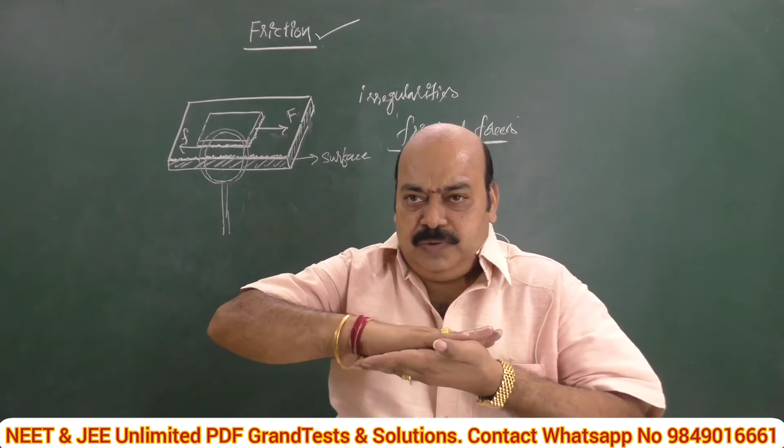Hence, we can prepare a definition for the title of today: Friction. What is friction? It is a force, of course. What type of force is this? An opposing force that comes into existence to oppose the relative motion between two contacting bodies. That means if we keep one body on the surface of another body, when one body tries to move, they are moving relatively, these forces come into existence in the opposite direction to stop this motion. They are called opposing forces. So, what is frictional force? The forces that come into existence when two bodies in contact with each other are moving relatively - such forces are called frictional forces.

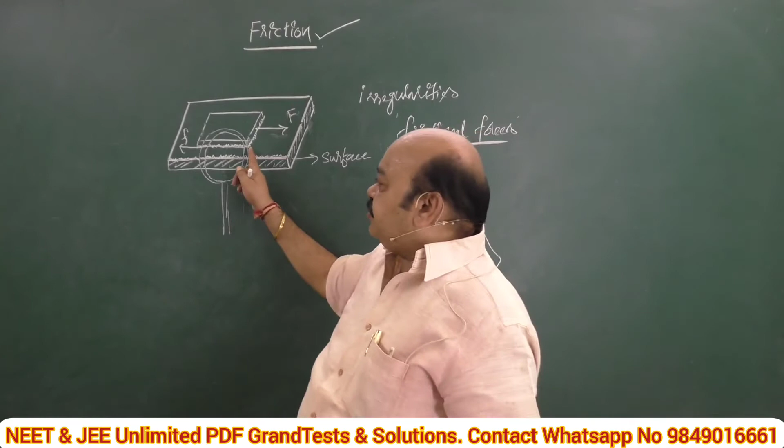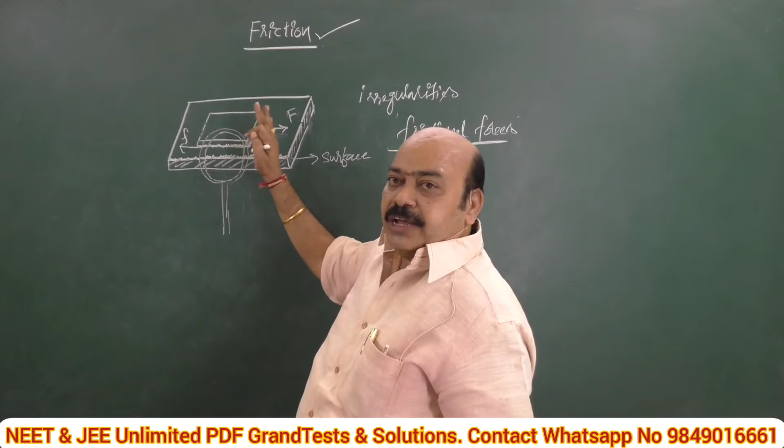Now, how many types of frictional forces are there? As per our discussion, more amount of force is required to just start the motion of a body, whereas once it is started, that much amount of force is not required to continue the motion. So now we are going to discuss different amounts of forces and what are the different types of forces. Let us come to the first one.

These are called static frictional forces. Static friction, simply static friction. Otherwise, this is also called limiting friction. Let us see what do you mean by this one.

It is a surface on which another body, say a wooden block, is placed, and here we are arranging a pulley. See, this is a pulley arranged to the edge. It is passed over this pulley and to this, a weight hanger is suspended. This is the position of the weight hanger.

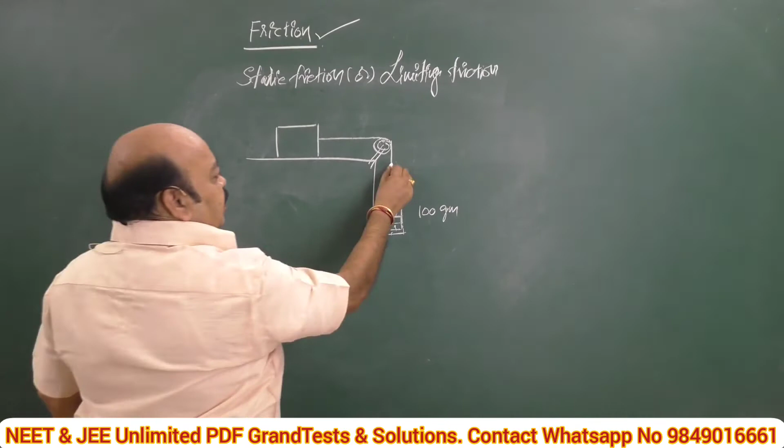So that we can change the amount of loads in this weight hanger. Imagine if I add 100 grams to this weight hanger. Definitely some tension we will notice in the string. It does not move. If we add one more disc of 100 grams, that means now it is increased to 200 grams. Now also it is not moving.

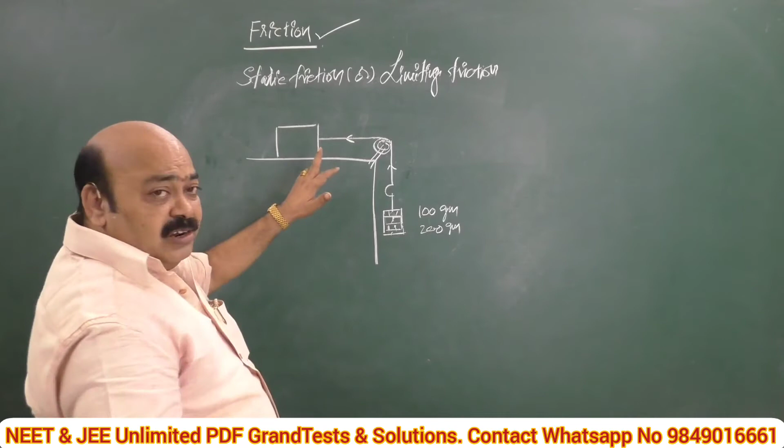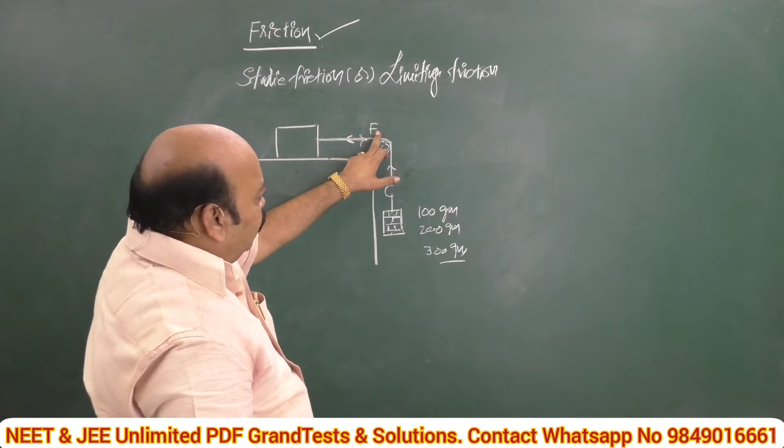At a particular stage, say for 300 grams in the weight hanger, it tends to move. That's why here the force which is pulling this is called F. This friction, this force comes equal to the frictional forces which oppose the motion. Hence it just begins to move.

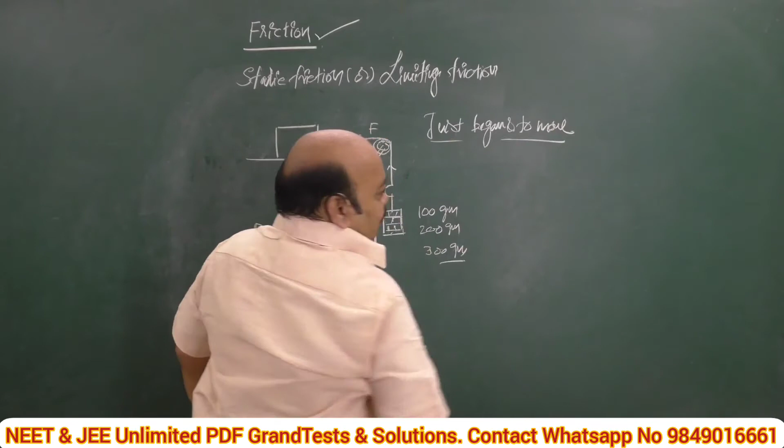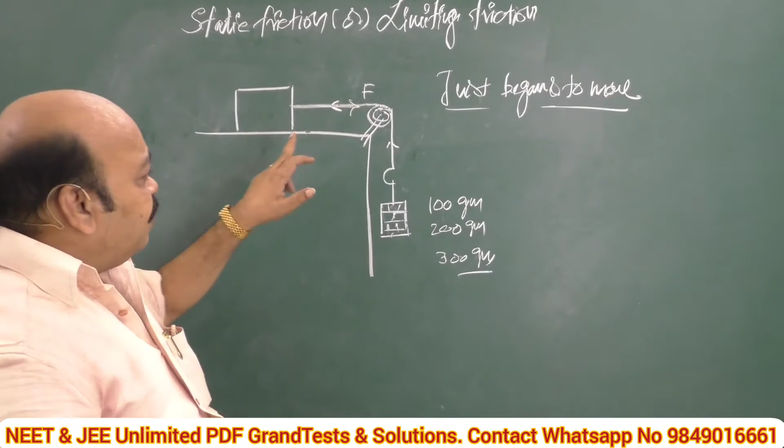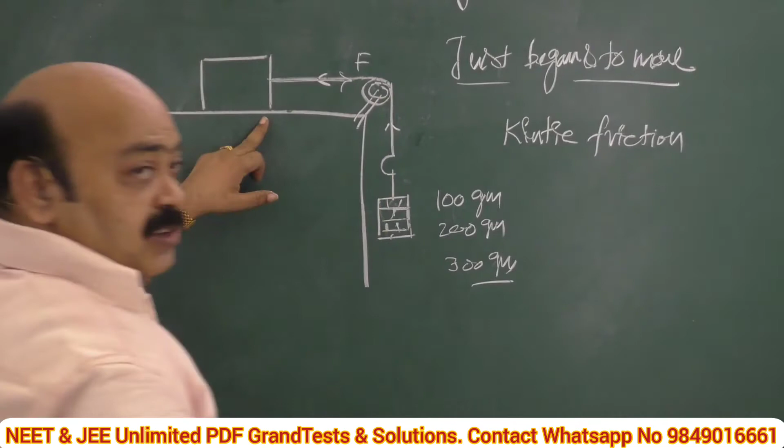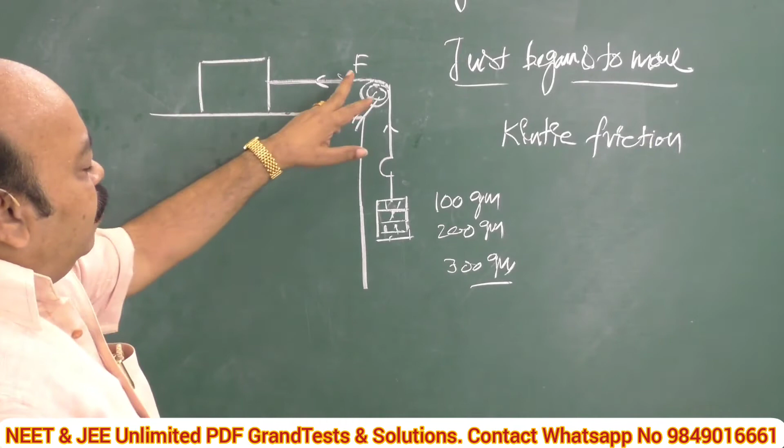Later what happens? Even if we do not increase the load, once it is started, it continues to move. Then the frictional forces that come into existence are called kinetic frictional forces. Kinetic friction. So the force required to just start the motion of a body over the surface of another body is called static friction, and the force required to continue the motion is called kinetic. The frictional forces that come into existence then are called kinetic friction.

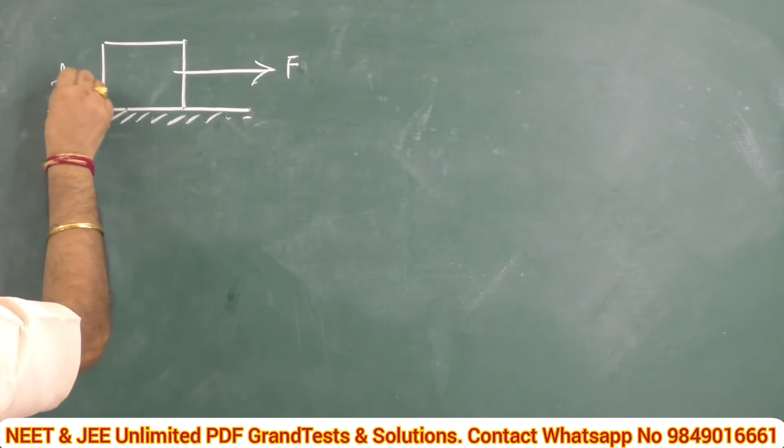Now we will try to get some conditions. Just we will consider the block diagram of this one. That means this is the block on the surface of a horizontal plane. Here this is the applied force F. As per our discussion, when this is pulled with a force F, opposing forces come into existence - they are called static friction or limiting friction, Fs.

Now let us take one by one. Case number 1: what happens if F is equal to 0? F equal to 0 means when no external force acts on the body. What happens? The block will be at rest. Simple - no force is applied, so it is said to be at rest.

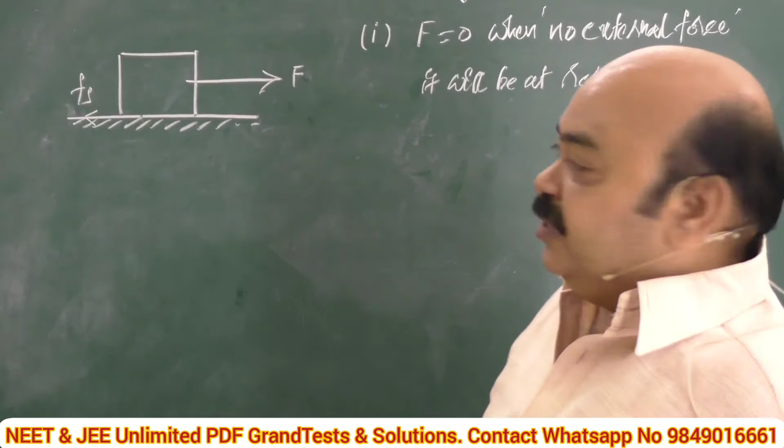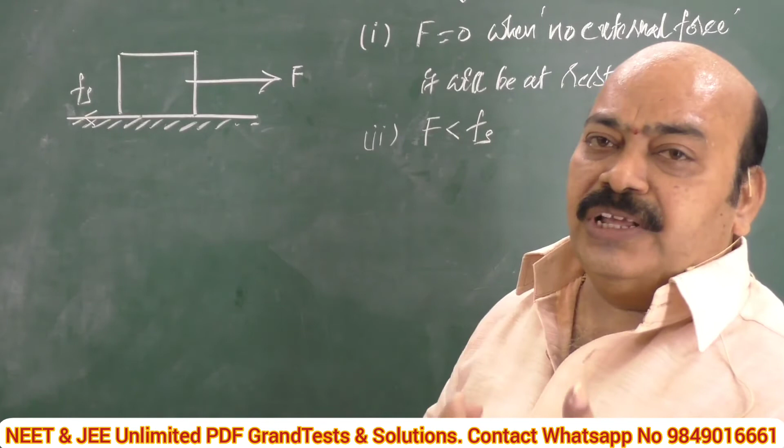Case 2: if we apply some external force, but that applied force is less than the limiting frictional force - that means F is applied, but it is less than what is called static frictional force. What is static frictional force? The force that comes into existence when a body just tends to move on the surface of another body is called static frictional force. Then when the applied force is less than static frictional force, what happens? In the previous case it does not move - that is at rest. In this case, same - it does not move, but it tends to move. Such motion is called impending motion. Technical word: it is impending.

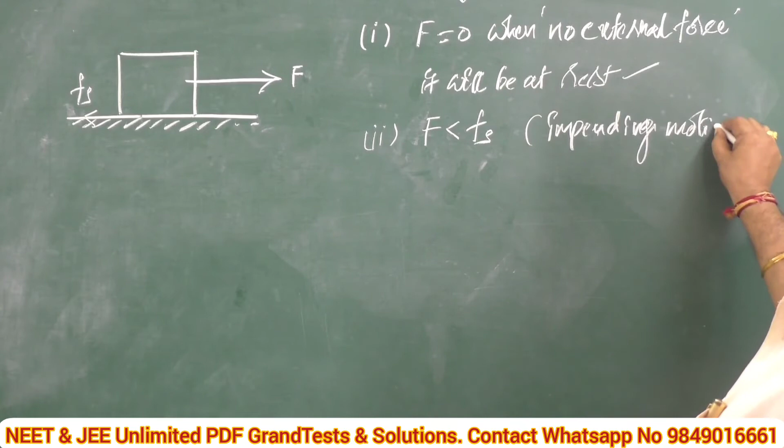Impending motion means what? Actually it is supposed to move, but originally it is not in motion. Such is called impending motion, developed inside this one. That's why even when we apply some force, it does not move, and these frictional forces developed are so called self-adjusting forces. Frictional forces are hence self-adjusting forces.

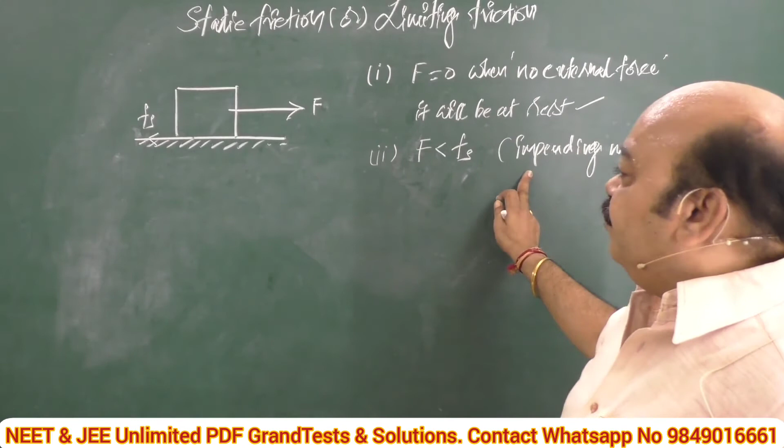Case 3, now see this one. If applied force, so called external force, becomes equal to static frictional force, what happens? Case 1, no force is applied. Case 2, force is applied, but it is less than static frictional force. Number 3, external force applied is equal to static frictional force.

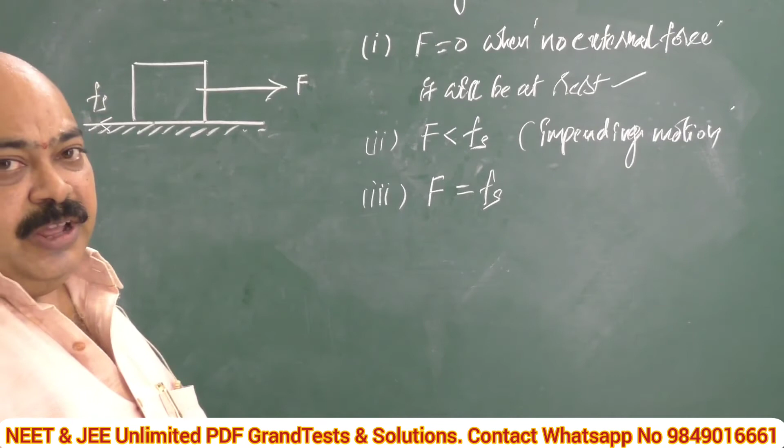Then what happened? According to the definition, when a force equal to static frictional force is applied, the body just begins to move. It just begins to move.

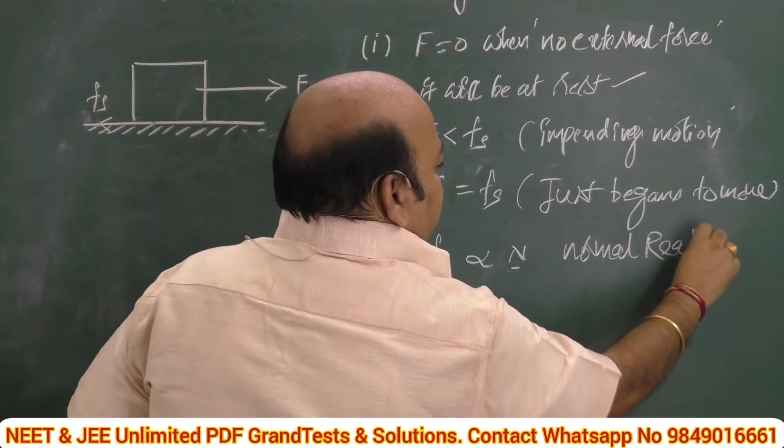And here one more interesting thing is there. It obeys one law also. That means this static frictional force, so called Fs, is directly proportional to N. Here I am introducing one more word. What is called N? N means normal reaction. Normal reaction. While explaining Newton's laws, number of times I repeat the word normal reaction.

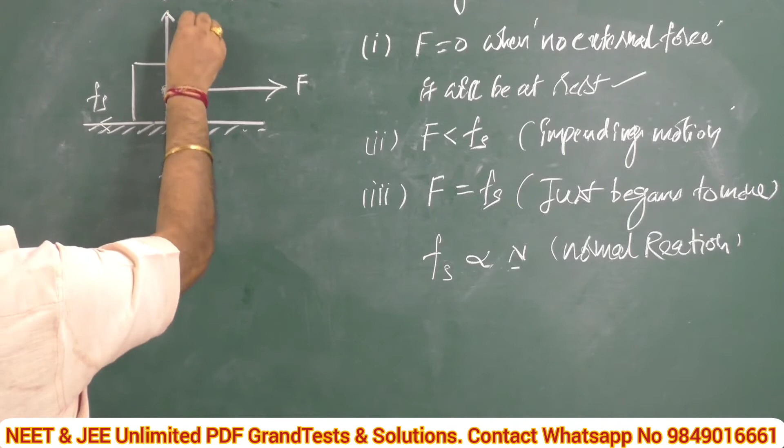What do you mean here? What is the normal reaction means? See, its weight, mg acts vertically downwards. This is action. As a reaction, equal amount of force is applied in the opposite direction. This is normal force. This is called a normal reaction.

Fs proportional to N. If we introduce a constant here, this is called mu s N. Since N is nothing but mg, I can replace this one as, see, I will write once again. What is this? Fs, static frictional force, is equal to mu s into mg. This is.

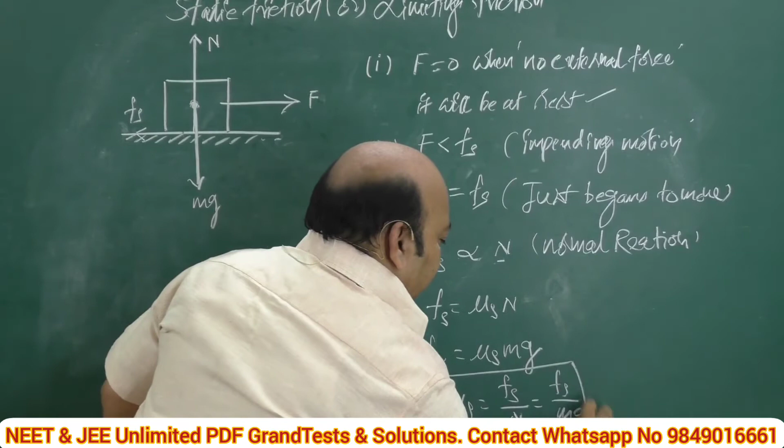Therefore, mu s is equal to Fs by N, which is nothing but Fs by mg. So we can define the coefficient of friction. Here we introduce a constant now, which is called proportionality constant. Actually, that is nothing but coefficient of friction.

Shall I repeat once again? What is this? This is called coefficient of which friction? Static friction. Coefficient of static friction. Okay, these are the cases.

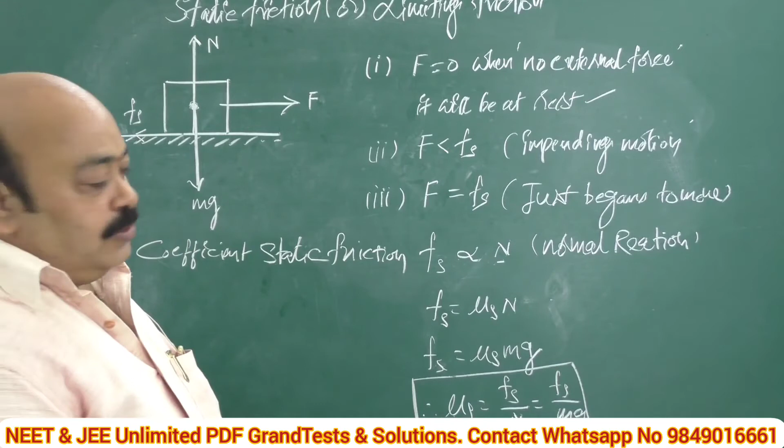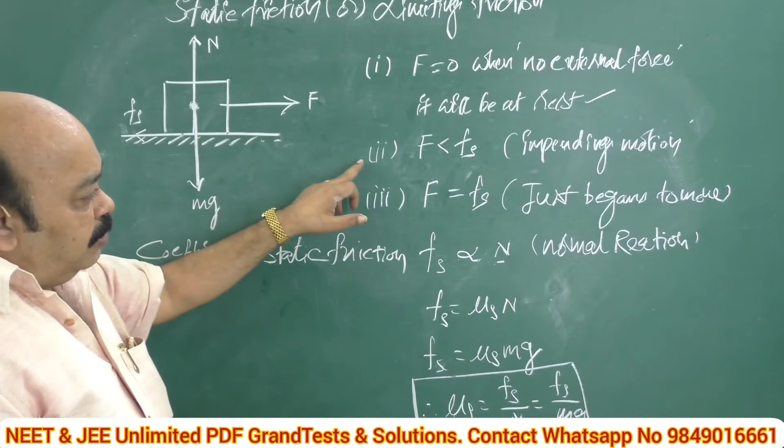Once again, shall I repeat this one? If we applied certain force, different cases we are going to discuss. Case 1, what happens if no external force is applied? It is a simple thing. When no force is applied, the block will be at rest. Number 2, some force is applied, but this is less than the static friction force.

When we apply some force, automatically the body is subjected to impending motion. Impending is a nice word. Try to use the textual language while presenting in the examinations. Impending motion means actually the body is supposed to move, but it is not moving. Practically it is not moving. When we are applying force, it is ultimately subjected to force.

This is case 2. As case 3, if this applied force is equal to the static frictional force, then what happened? The block just begins to slide, just begins to move.

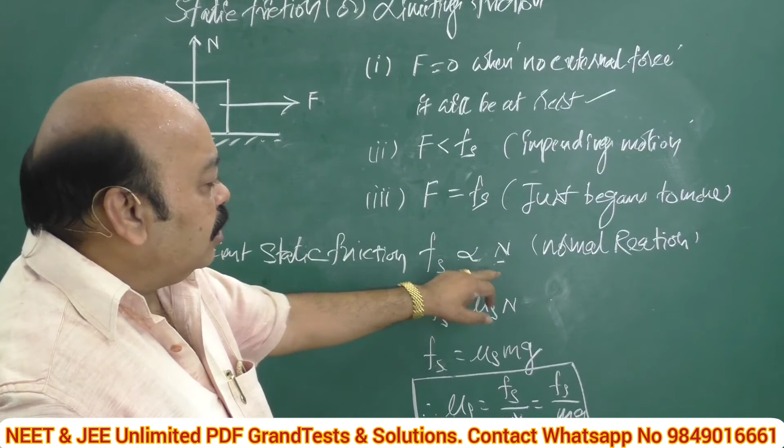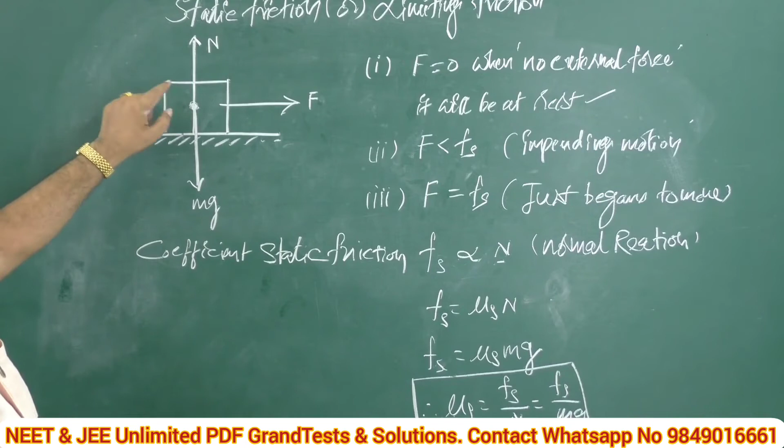In such cases, so-called frictional forces are found to be directly proportional to the normal reaction. What do you mean by normal reaction? The action applied by the floor on the body in the vertical direction as a reaction. As action, what happened? This body's mg acts downward, and as normal reaction it is in the opposite direction. Here Fs is proportional to normal reaction.

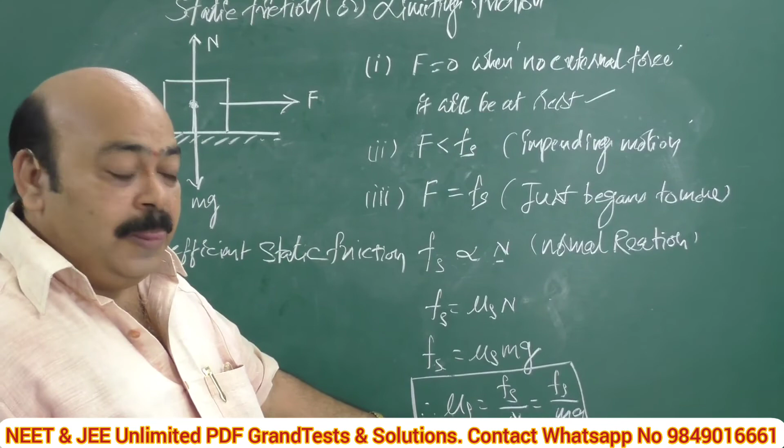By looking at the formula, I am going in the reverse direction. Generally, after memorizing the definition, we go to the formula, but this is an easy technique. Once you mind this formula, you can derive the definition of this one. Can you try yourself? Define coefficient of static friction.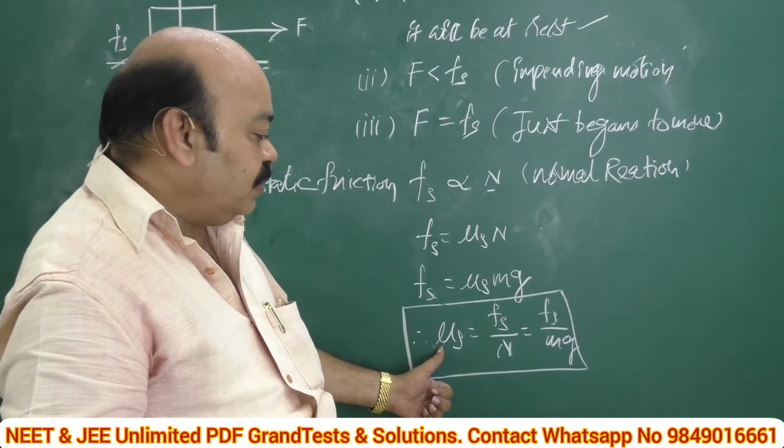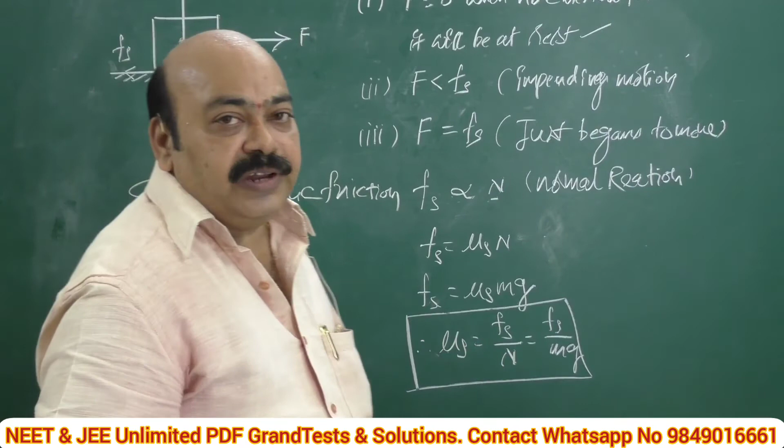Now, in the next case, what I am considering is the minimum force required to just move the block is defined as static friction. My question is, what happens if the applied force is continued once the block also just begins to move?

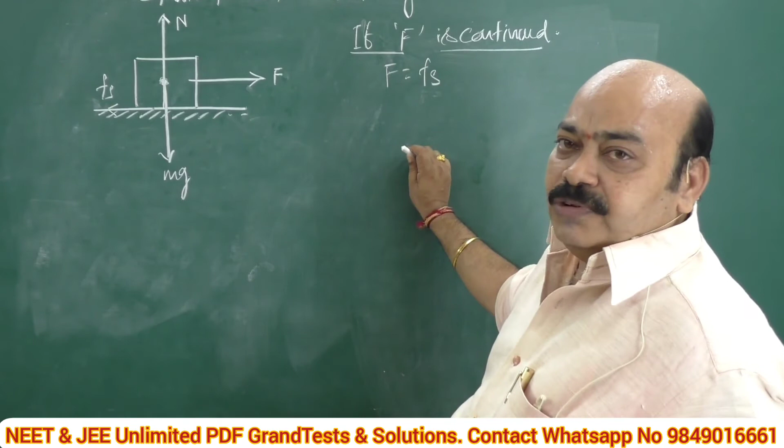That means if external force F is continued, what happens? Here the quantity F is equal to Fs. Even after the block just begins to slide, if we apply the same force, what happens? The body continues to move.

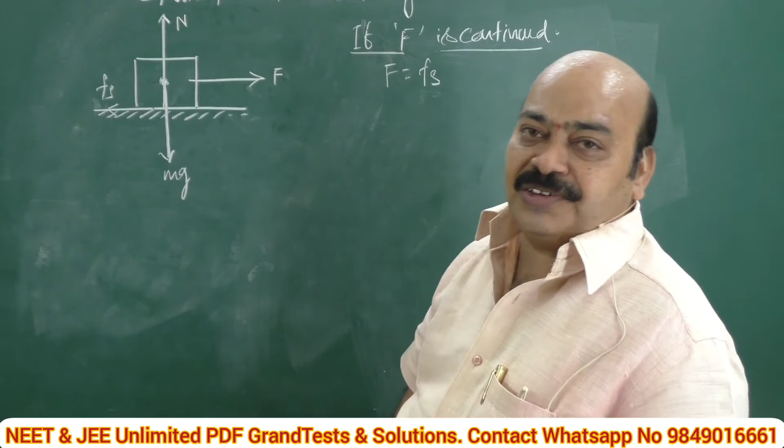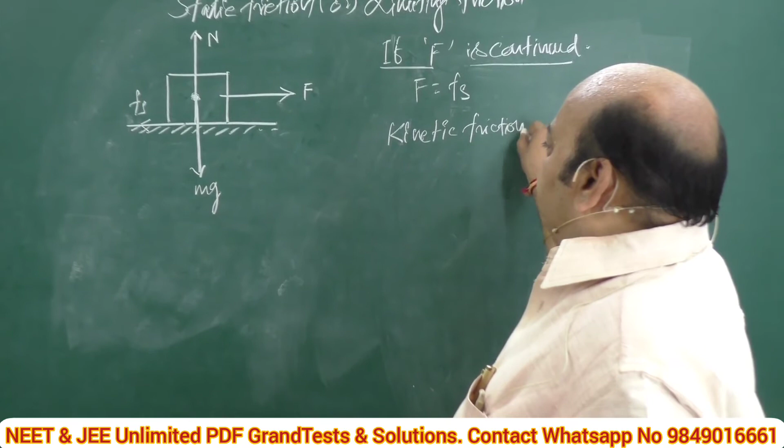When a body continues to move, the frictional forces which come into existence to oppose the motion of this block are called kinetic frictional forces. Note the word in the previous case was static, here it is kinetic. It has one more name: dynamic friction, or dynamic frictional force.

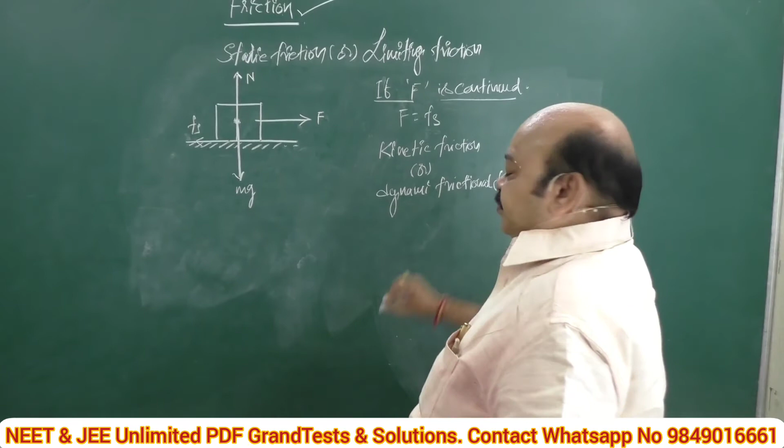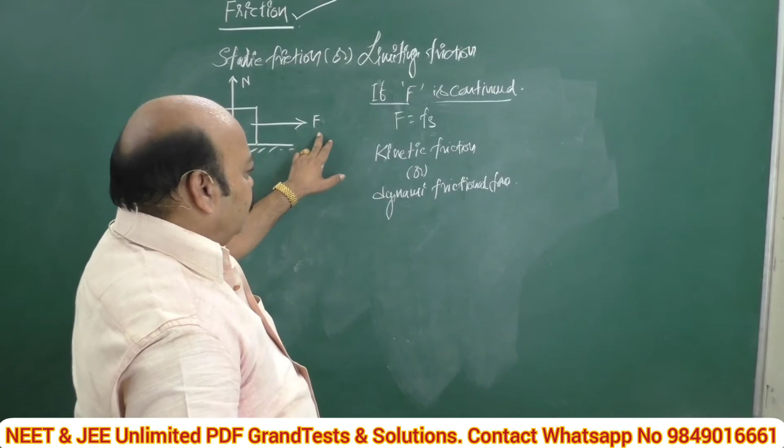Since the block has just moved and continues to move by application of the force F, what is the acceleration of this block? It is nothing but, the applied force is capital F. When it is moving, which force comes into existence? Frictional force, kinetic frictional force, divided by its mass.

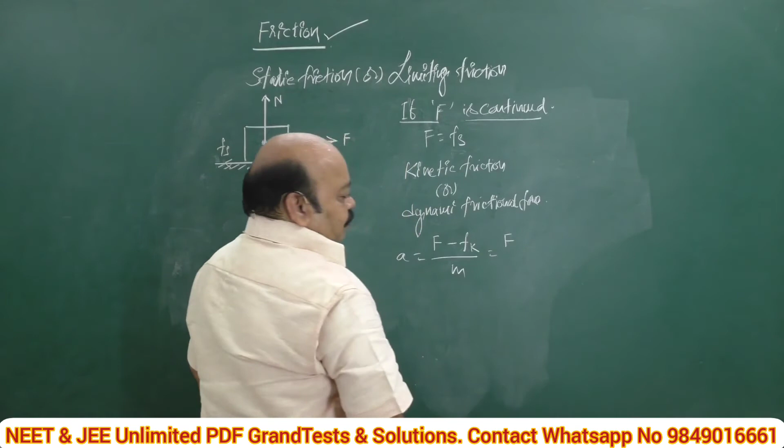This is called net force, capital F minus small f. What do you mean by this Fk? It is nothing but capital F minus mu k N, divided by m. But this capital F is equal to the static frictional force. So we can write the expression as Fs minus Fk by m, where Fs is mu s mg and Fk is mu k mg, whole divided by m.

If we take the common terms, the acceleration of the body is given by mg, we can take common, then it becomes mu s minus mu k into g, divided by m. The m gets cancelled, and the net value is mu s minus mu k into g. This is the acceleration of the body.

It's a fantastic relation. It will come across a number of times in our numerical problems. So please keep this in mind. What is the case, what is the situation?

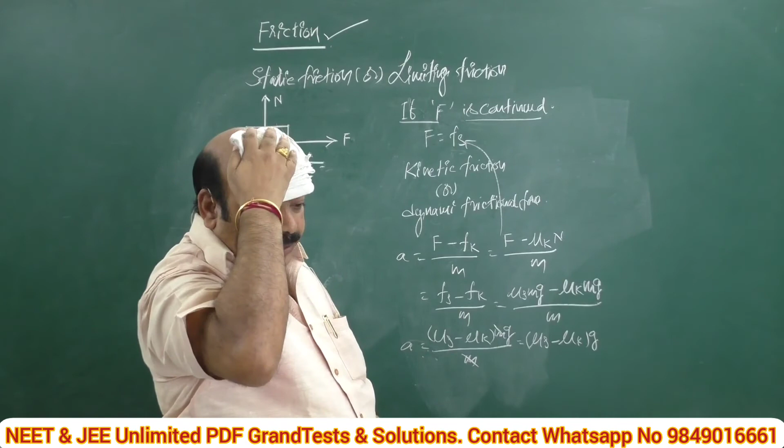When static frictional force is applied and the body just begins to move, and if the force is continued, what happens? The block continues to move. In this case, kinetic frictional force comes into existence, and the acceleration of the body is given by applied force minus the frictional force which opposes. This is called the net force acting, but this F applied is equal to static frictional force. So we can write this as Fs minus Fk.

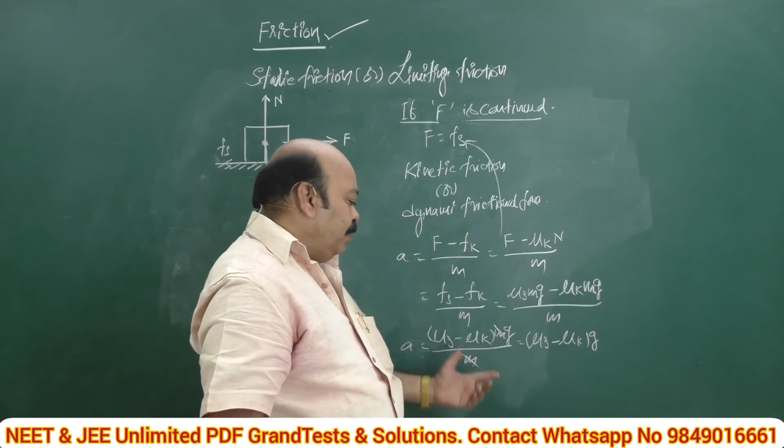Fs is nothing but mu s mg, and this Fk is equal to mu k mg. By taking common terms and cancelling, we get the net acceleration of the body as mu s minus mu k into g. I think you understood the concept.

Now I am moving to one more factor which is called rolling friction. Rolling friction, what do you mean by it? Rolling frictional force is represented by Fr, F suffix R. Simply, it's in its name only.

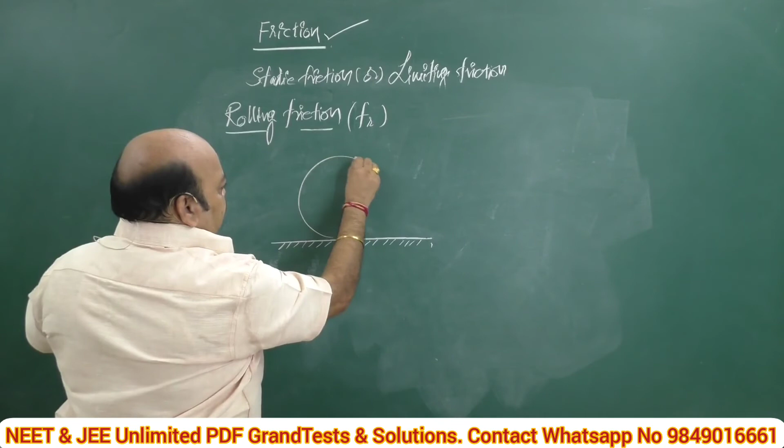In the previous cases, when a body is moving on the surface of another body, we observed how the opposing forces come into existence. In this case, what happens if a body tries to roll on the surface of another body? For example, imagine a horizontal surface, and here imagine a circular body. It may be a disc, it may be a football, spherical in shape, or it may be a ring like this.

Here is the good reason explained. I am going to explain why all the automobile wheels are circular in shape only. The model of the cars may change from year to year, so many models, but no one tries to change the circular shape of the wheel. Why? Because there is a strong reason behind it.

Try to understand. When a body is trying to roll, for example, if we push a football on a horizontal ground, it begins to roll, but it never continues its motion, that means it does not move continuously. As explained in Newton's laws, when a body is at rest, it continues to be at rest; when a body is in motion, it continues to be in motion. Like that, when we kick a football, it begins to roll, but after rolling a certain distance, it comes to rest.

My question is, what is the cause for arresting the ball? That means which forces bring the rolling ball to rest? Here, the frictional forces between these two, the rolling body and the surface, bring the body to rest.

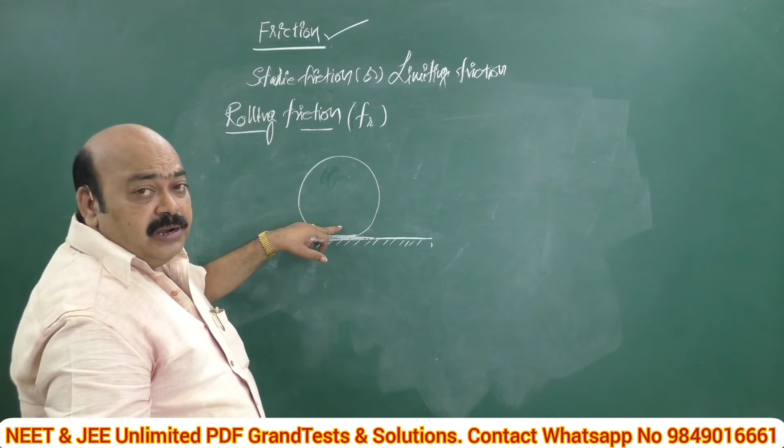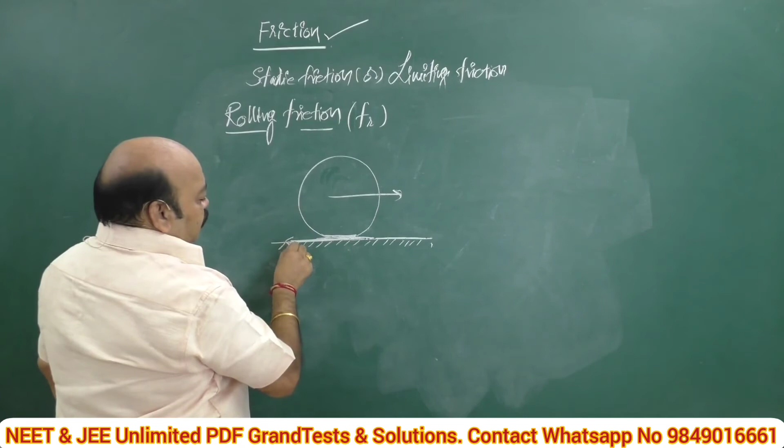And a very interesting thing: the road also flattens, the floor also flattens, but of course it is very minute which we cannot observe with our naked sight only. So it deforms temporarily, instantly it deforms. Hence there is good contacting surface between these two bodies. As a result, as it tries to move forward, some forces come into existence which try to stop this motion. They are called rolling frictional forces.

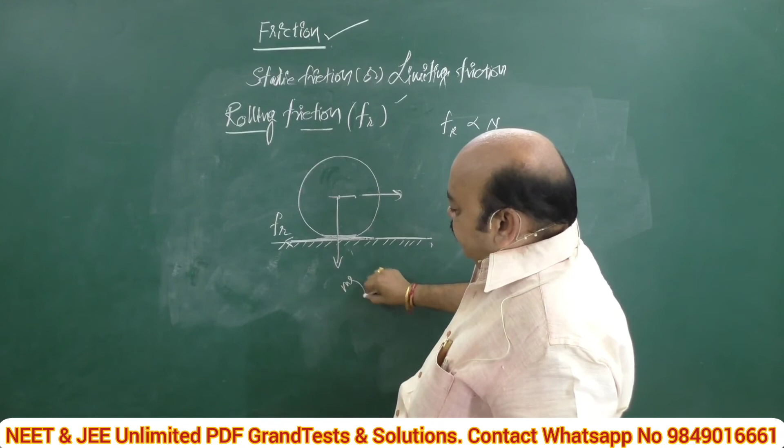These rolling frictional forces are directly proportional to the normal reaction. Weight acts downward as mg, and here it acts vertically upward. This is normal reaction, and introducing a constant, mu r. Now, mu r is a constant called, can you guess? Coefficient of rolling friction. So therefore the coefficient of rolling friction can be defined as mu r equals Fr by n. This is the formula. Mu r equals Fr by n.

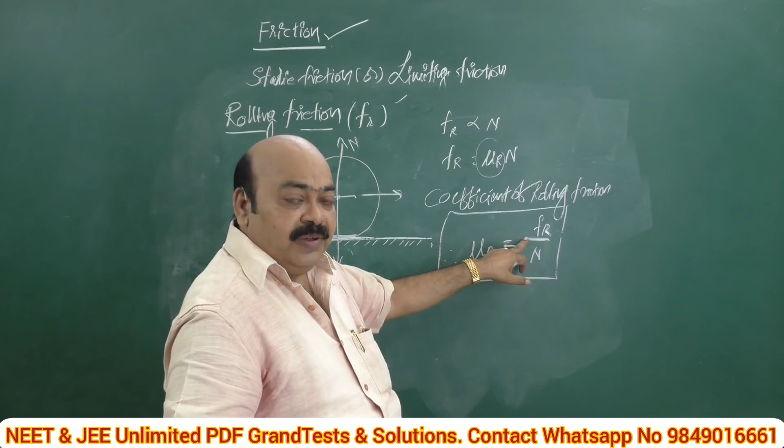Can you define in your own words what is coefficient of rolling friction? Comfortably. That's why I am telling you number of times, don't try to learn by heart. It is a formula associated with division. So start the definition with the ratio of, good, the ratio of which to which factor? The ratio of rolling frictional forces to normal reaction. I am trying to beautify the definition using soft, convenient language. The coefficient of rolling friction is defined as the ratio of rolling frictional forces to normal reaction. That's it.

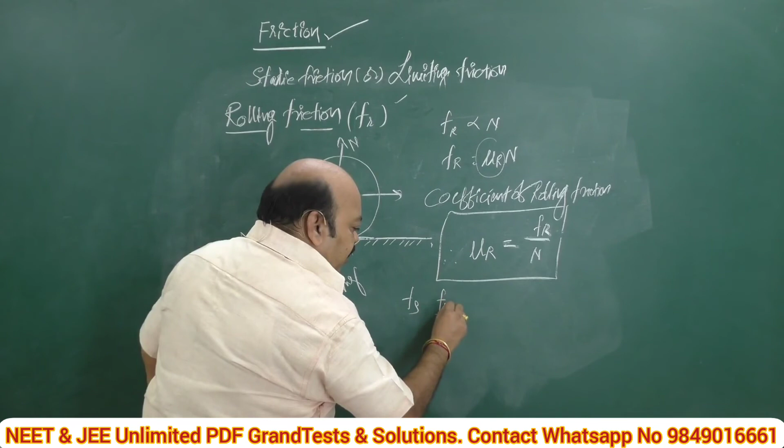By observation, we have three types of frictional forces by name: Fs, Fk, and Fr. What do you mean by Fs? Static frictional force. What is the next one? Fk. What do you mean by Fk? Kinetic frictional force. And finally, what we have is Fr. Can you establish a condition between these three items? Condition means which will be greater, which force will oppose the motion greatly, that is called the more opposing force. Undoubtedly, that is static frictional force.

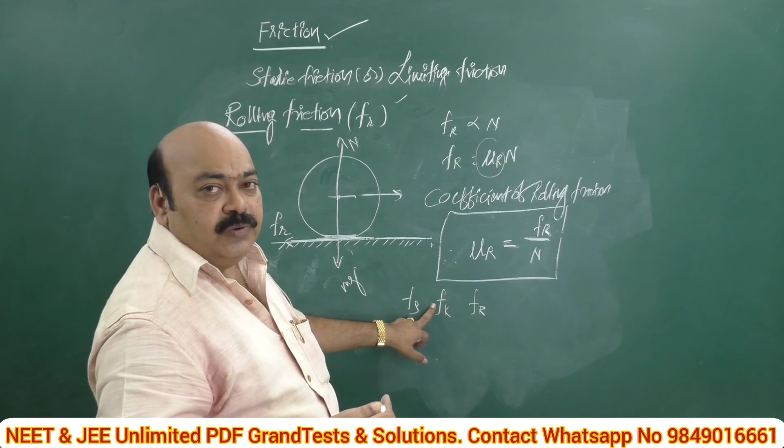The force required to just move the body is called static frictional force. To overcome this static frictional force, once the body is started, the forces that come into existence are called kinetic frictional forces, which are comparatively lesser than the static frictional force. Almost these rolling frictional forces are negligible when compared to the other. That's why there is a relation between these three: Fs is greater than Fk, and that is greater than Fr.

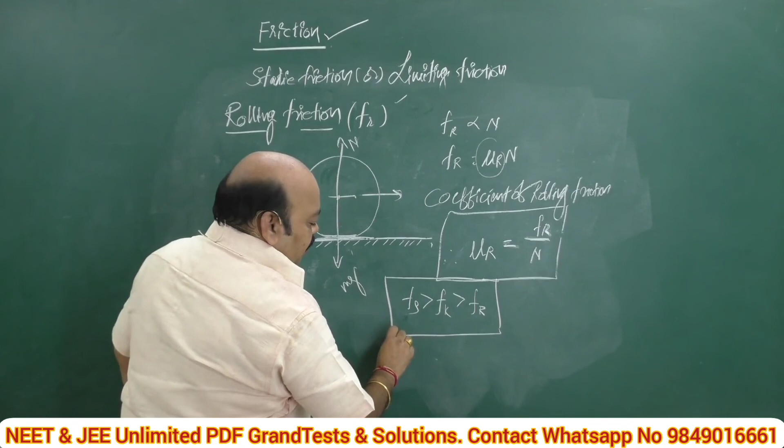Another important point, and if I am not mistaken, it has previously been asked in the board exam as well as in objective type questions. So shall I summarize today's class? What factors, what items were covered today? Number one, what is friction? Frictional force comes into existence when two contacting bodies move relative to each other, simply called the opposing forces that come into existence when two contact surfaces try to move one above the other.

How many types of frictional forces are there? Three: static frictional force, kinetic frictional force, rolling frictional forces. Define coefficient of static frictional force. Coefficient of static frictional force is defined as the ratio of static frictional force to normal reaction.

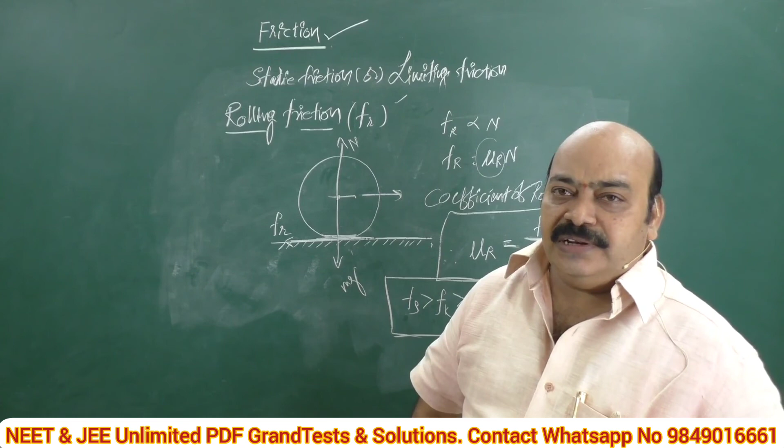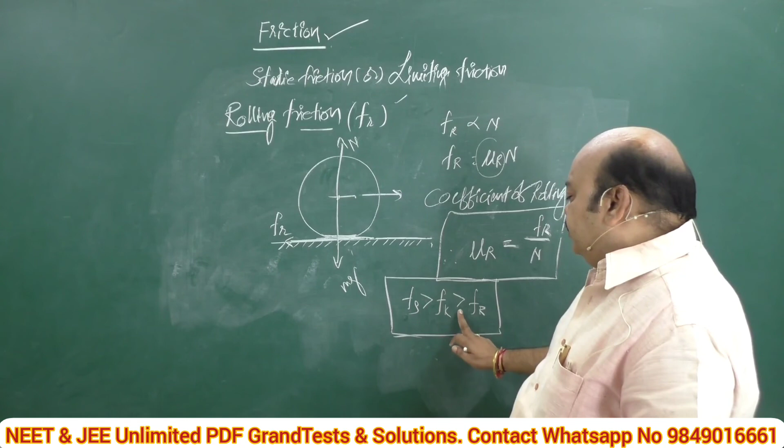Next definition: define coefficient of kinetic friction. Coefficient of kinetic friction is defined as the ratio of kinetic frictional force to normal reaction. Finally, what is rolling frictional force? The coefficient of rolling friction is defined as the ratio of rolling frictional force to normal reaction. What is the relation between these three? Frictional force Fs is greater than Fk, and this is greater than Fr. That's all.